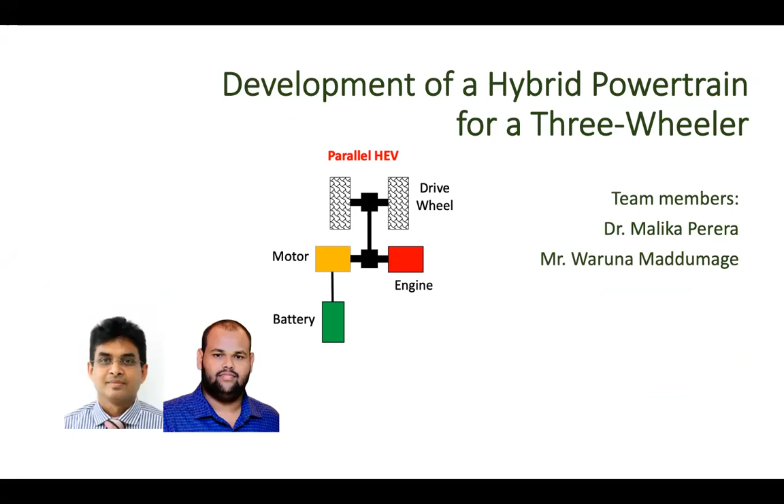So the main objectives of this project are to investigate the effect of hybrid configuration and drive cycle on fuel consumption and emissions, and establish an optimal power management real-time control strategy.

Through this study, it is expected to investigate the fuel use and emissions with different powertrain architectures for three-wheelers operating in urban areas, develop an optimal controller considering gear shift and power split ratio of a three-wheeler, then to establish a systematic and easy to implement methodology to develop a real-time near-optimal rule-based strategy.

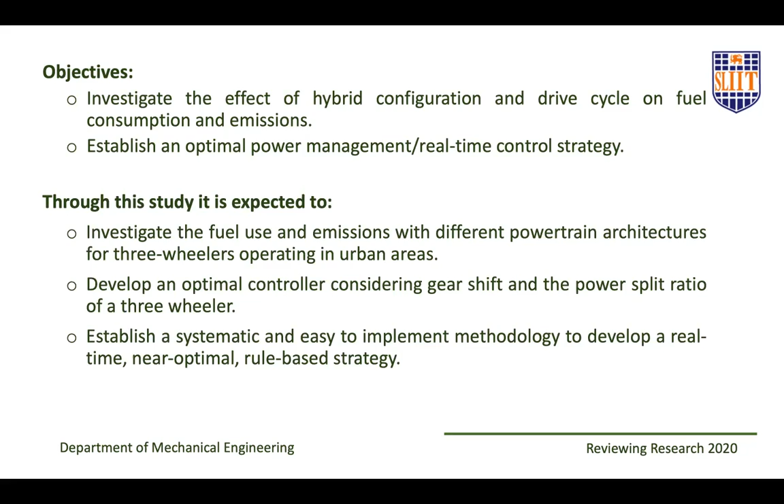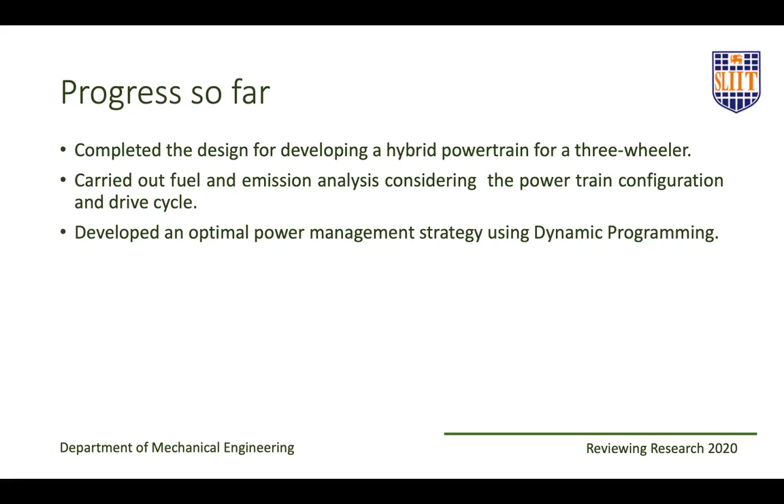So when you consider the progress so far, this research has completed the design for developing a hybrid powertrain for a three-wheeler. It has carried out fuel and emission analysis considering the powertrain configuration and drive cycle. It has developed an optimal power management strategy using dynamic programming. And finally, a rule-based strategy was developed from the dynamic programming results.

So I would like to show some key results from this study. Fuel consumption and emissions analysis for different hybrid configurations and drive cycles have been studied. It shows that compared to the series hybrid configuration, the parallel hybrid configuration performs much better in urban drive cycles. And also reduction of fuel does not necessarily indicate a reduction of emissions with a hybrid electric powertrain for a three-wheeler. These findings have been presented in a journal paper in Journal of Science and Technique.

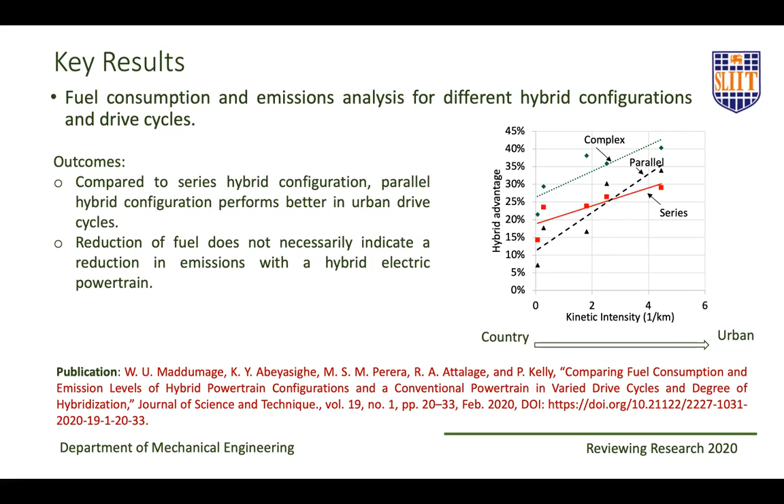Then in the next study, a near optimal power management strategy for hybrid three-wheelers has been developed. The findings of this study will be published in Energies journal. Now, according to the findings, it shows that the parallel hybrid powertrain proposed for three-wheelers under Sri Lankan conditions can reduce the energy consumption by almost 53%, more than 50%.

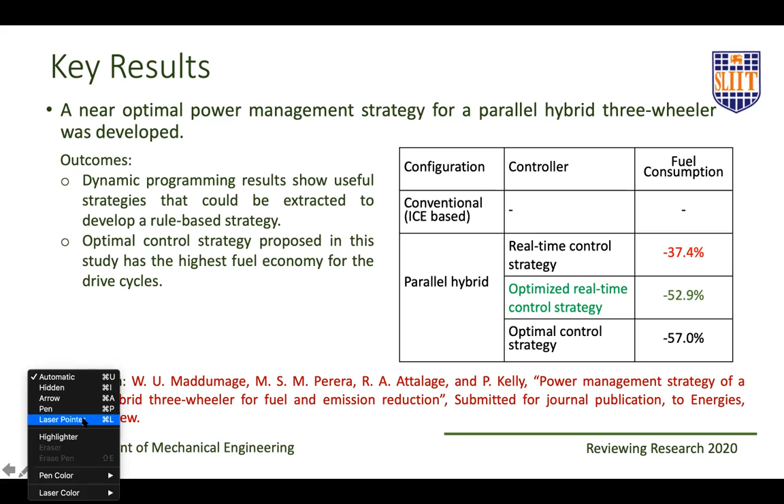Let me move to the research that I am involved in. The main area of my research is energy consumption and climate change mitigation. Under this, there are two main projects. Let me first cover the first project, which is real-time domestic energy optimization for energy conservation using AI techniques. The team members are myself, then we are collaborating with Dr. Chitra Langamana from University of Waterloo, Canada. Then Mr. Madhava Herath and Mr. Taksila Tilakanayaka are the other team members for this project.

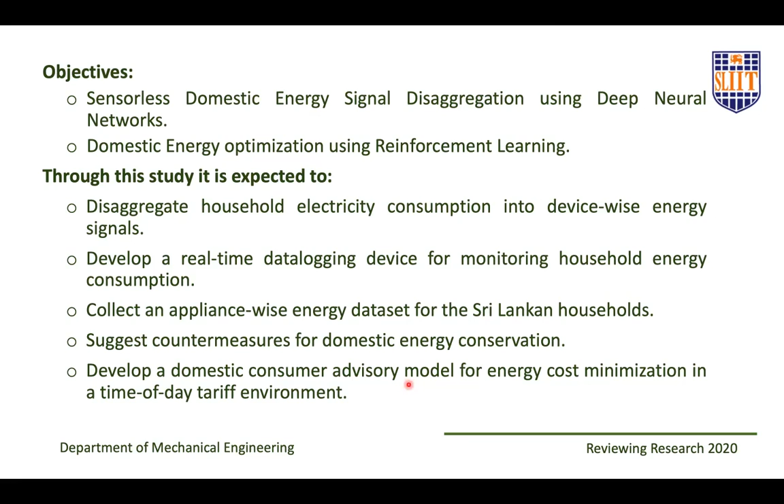Objectives of this study are sensorless domestic energy signal disaggregation using deep neural networks and domestic energy optimization using reinforcement learning. Through this study, it is expected to disaggregate the household electricity consumption into device-wise energy signals, then to develop real-time data logging devices for monitoring household energy consumption, collect an appliance-wise energy data set for Sri Lankan households, suggest countermeasures for domestic energy conservation, and develop a domestic consumer advisory model for energy cost minimization in a time of day tariff environment. So let me present some key results.

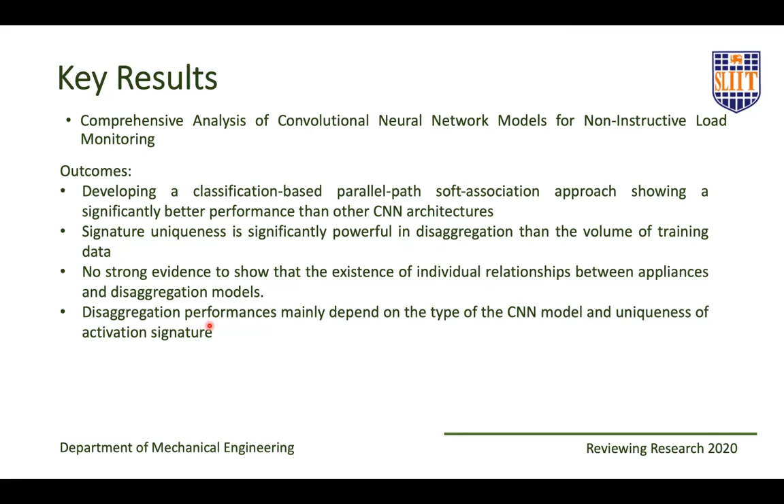A comprehensive analysis of convolutional neural network models for non-intrusive load monitoring was carried out. This study showed that a classification-based parallel path soft-association approach shows significantly better performance than other convolutional neural network architectures. Signature uniqueness is significantly more powerful in disaggregation than volume of training data. No strong evidence showed the existence of individual relationships between appliances and disaggregation models. Then the disaggregation performance mainly depends on the type of CNN model and the uniqueness of the activation signature.

The outcome of this study was presented at the ICUE conference held in Thailand last year. So these are some of the results. I'm not going to go into detail due to the constraints of time. We are planning to complete the following tasks during 2021-22. We are planning to develop an AI-based model for real-time self-learning energy disaggregation.

Then we are planning a domestic consumer advisory system for energy cost optimization in a time of day tariff environment using reinforcement learning. Then we are planning to develop the first ever Sri Lankan domestic energy consumption data set.

For this, we require a data logger. Design and development of the data logger is completed, and we also develop a real-time domestic faulty electric appliance identification model, which is almost complete. Then we are also planning to take this research to various organizations like CEB and PUCSL and get some sponsorship.

And we are also planning 8 journal and conference papers. Especially we are targeting journals with high H index so that it will give some recognition to our work.

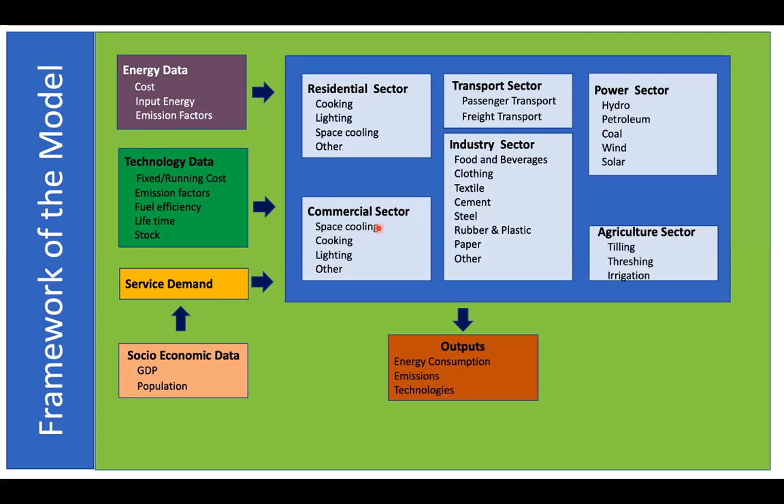Then to estimate the energy and environmental implications for different emission pathways using the energy systems model developed by us. Finally, we are going to analyze some scenarios that will take Sri Lanka to carbon neutrality. So this is the framework of the model that we have developed. It considers both energy supply and energy consuming sectors in the whole economy.

So I would like to now present one of the studies that was presented in the ICUE conference held in Thailand. This considered the potential role of carbon tax to achieve Paris Agreement targets. Under this, we considered 3 different carbon tax rates for Sri Lanka, and these carbon tax scenarios have been presented in a global database where the countries could implement. These 3 scenarios are referred to as TAIM, TGCA, and TREM scenarios.

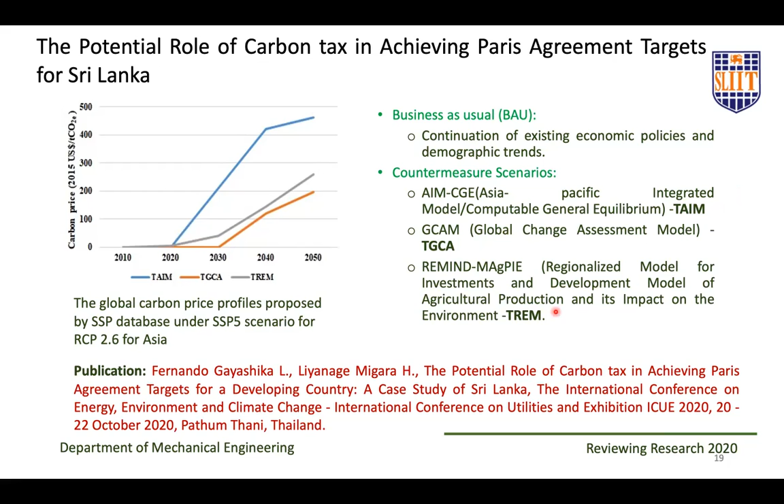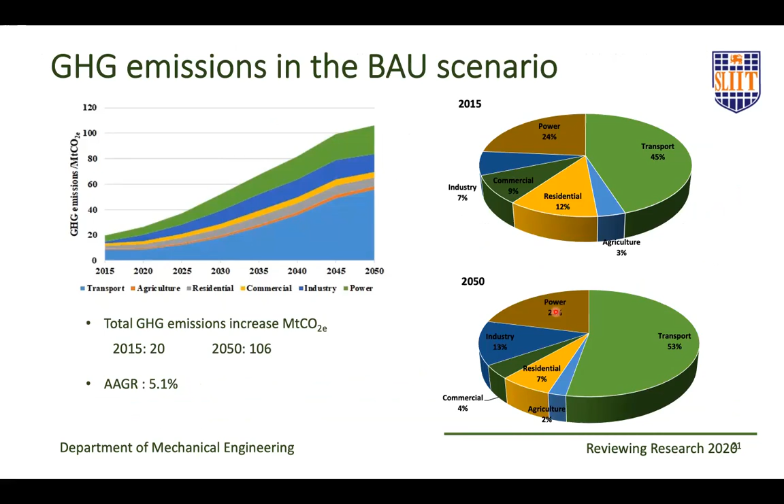So in this study, we saw that under the business as usual scenario, the carbon dioxide emissions will increase from 20 million tons to 106 million tons at an average annual growth rate of 5.1%. And we see that by 2050, the TAIM scenario will be the most effective, and it could reduce up to 24% of the GHG emissions as compared to the base case.

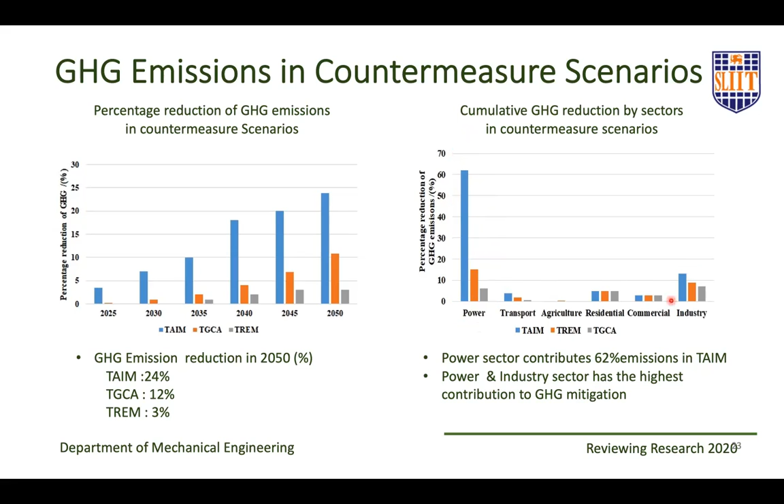And when we consider the contribution from different sectors, we see that in TAIM scenario, the power sector will contribute almost 62% for reducing carbon dioxide emissions, and this will be followed by the industry and transport sectors.

So considering the plan during 2021 and 22, we plan to complete the development of scenarios leading to carbon neutrality in power, industry, and transport sectors by 2050. Then we plan to complete the development of different emission pathways according to the IPCC guidelines on shared socio-economic pathways.

Then finally, we plan to complete the estimation of marginal abatement cost of carbon dioxide reduction and analysis of co-benefits of carbon reductions. And then we plan to promote collaborations with Sustainable Energy Authority and Climate Change Secretariat and CEB, so that it will give some recognition to our research from these government organizations.